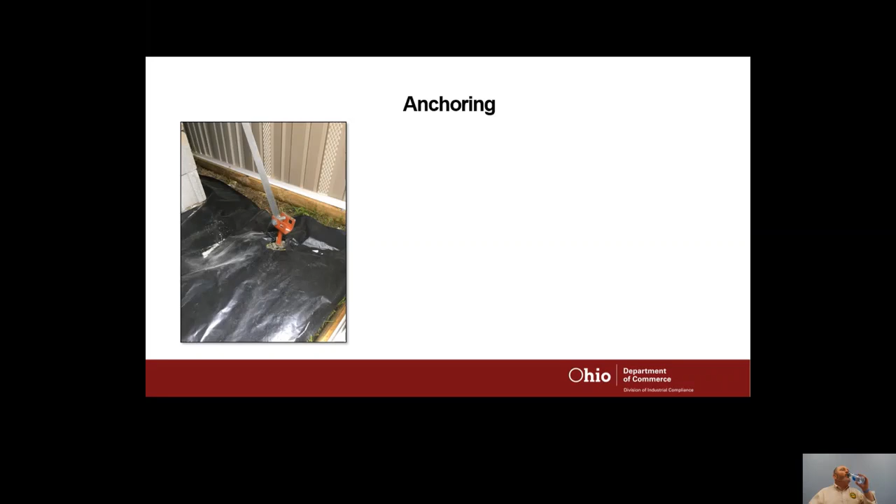Okay, another anchor strap. The picture that I am showing here, and what I want you to notice, is the amount of turns that is on the strap itself.

The manufacturing companies of these anchors will give you in the installation instructions how many turns they want you to make when you're putting in the anchor. If they say, hey, we want you to do 4 or 5 turns, 6 or 7 turns - just doing it as an example, okay - you have to follow that.

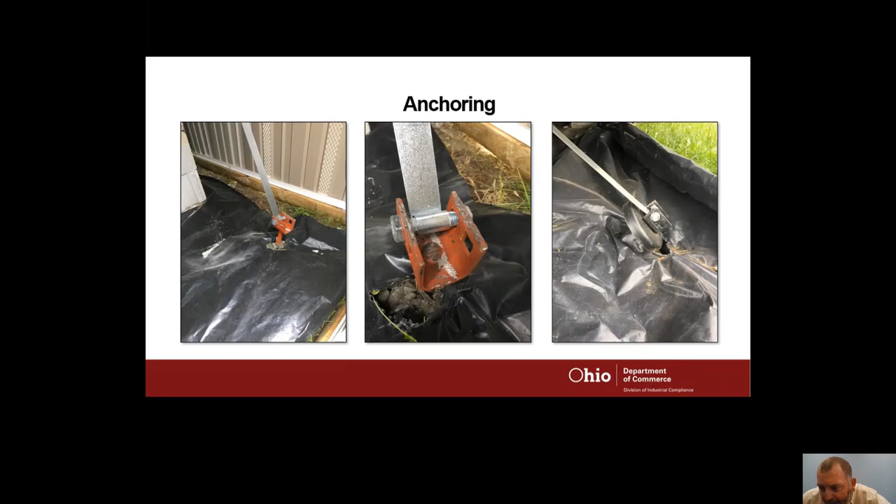Next picture is the zip cap. Now, there is no zip cap manufacturer for tie downs out there that will not tell you that the zip cap must be flush into the ground. As you can see in this picture, you could walk over and stick your foot and stand on the vapor barrier, and have your foot in between the vapor barrier and the top of that zip cap. Heck, you could even put probably most of your foot underneath the back end of the zip cap and the ground.

So it's another installation issue showing that if you're going to use the zip cap, you must have it flush into the ground - it has to be into the ground. Every manufacturer that makes these types of tie downs, in their installation manual, that's what it's going to tell you. It must be done, okay. Again, the reason why is because that's not going to hold.

You know the reason these anchors are made is because they're engineered to withstand the pressure of a wind event that may come through and try to push that home off its foundation. All the engineering these companies have done is basically to meet those requirements. We don't have to worry about those requirements because we're not the ones building these products. When we buy them, they've already been engineered and manufactured to meet these minimums, the 3150 working load.

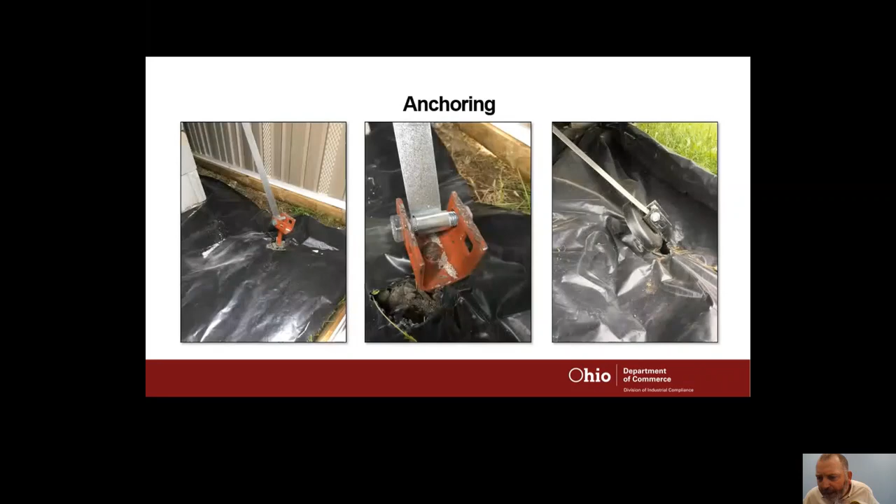I'm not going to just take one home and pick it apart. I mean, I will, and it needs to be fixed, but I'm just letting you know, when I tell you guys this is what I'm seeing in the field, maybe you think I went to one house and found all these problems and that's where all my pictures are coming from. I'm just showing you pictures from different sites, and that's why I'm giving this presentation today. If it was just one home and I never seen it again, this presentation would be a lot simpler and we'd talk about different things, but it's not. It's different sites, it's everywhere in Ohio that I'm seeing these things, and that's why we're talking about it today.

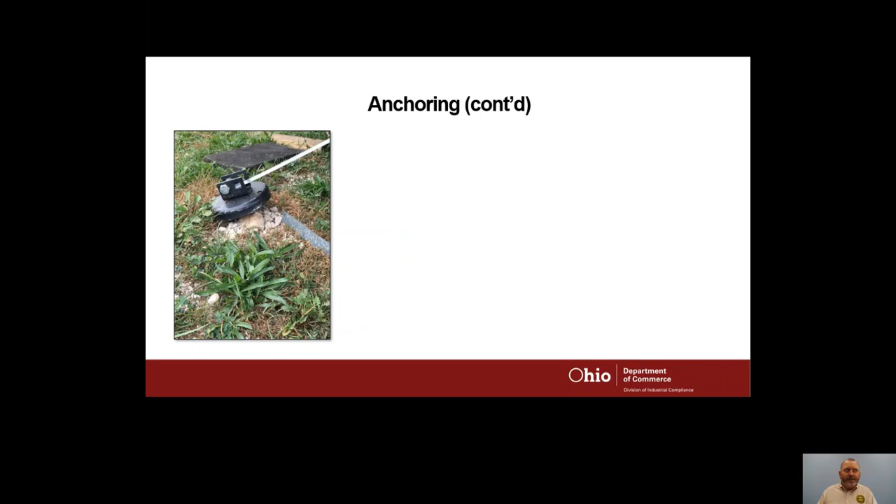Another zip cap, obviously a different home, different site. Another one that's above ground. Now, I understand with the gravel, it probably poses an issue when you're putting that zip cap into the ground. Personally, I think you're all probably saying to yourself, that person, whoever they may be, probably should have put the zip cap in first and then put the gravel in. I don't know if they did it, but to me it looked like they put the gravel in and then tried to put the zip cap anchor in. Should have been the other way around. But again, it's outside of the ground, not installed correctly.

Again, if something happened to that home, whoever installed that product will be held accountable for whatever happens from that scenario.

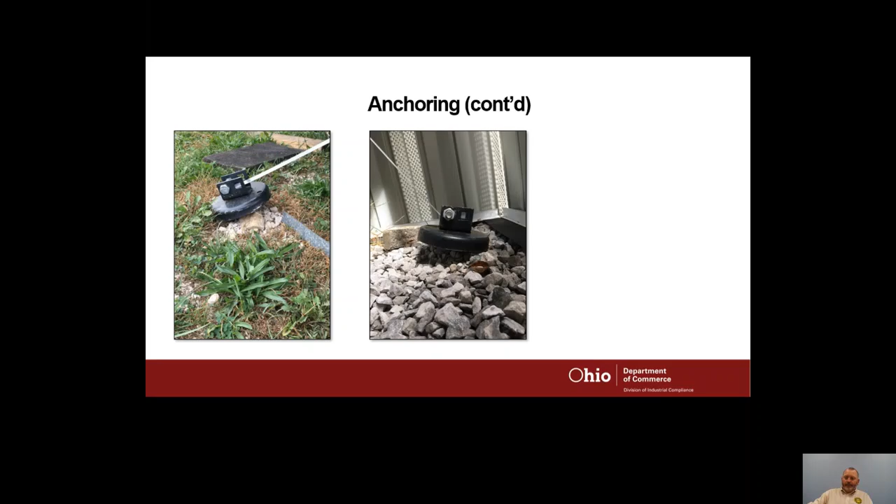Again, another zip cap. Now the last two pictures probably are from the same home. You can see that the vinyl skirting is vented all the way around, gravel, in the same kind of scenario. Doesn't look much different than the other one.

But again, whoever put these anchors in on the four corners, all four of them are going to be like these last two that I've shown you.

I guess it would be a little bit more frustrating if you went to a house and seen one corner anchor done completely 100% the right way, to the installation instructions, and then you walked around and seen the three other ones not the same way or done to the instruction manual. That would be frustrating because you'd be like, well, wait a minute, you did the one completely the right way. Why are the other three not?

We would have probably an answer for that, and I'm sure you're thinking about that, but I very, very seldom see something like that where I see something perfect - and when I say perfect, to code and to the instruction manual of the manufacturer - and other ones not.

Now, I'm not going to say I've never been to a house and seen anchors where they just did the four corners and seen three of them perfect and one of them not, and there was a reason. That happens. We all know that happens. But whatever that reason is...

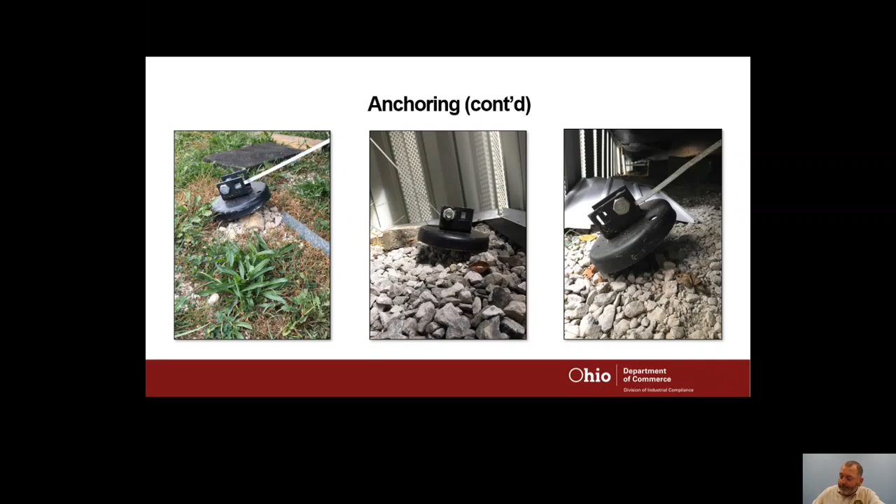Okay, another one on the anchoring. You can see the stabilizing plate, it's out of the ground, it's not installed correctly. The head of the anchor is obviously a lot further out of the ground, and you get to the point where when you see something like this, you just think to yourself, well, how did we get to this point right here, where you got the right material, you got the right product.

I've seen a lot of them without stabilizer plates. So he's got the stabilizing plate, but yet the stabilizing plate's not into the ground to code or to the installation manual, and the anchor is not flush with the ground with the stabilizing plate.

So, you know, it's like you used the right product, you went as far as doing all that work, and I don't know, I can't put an exact time on it, but let's say it's 5 more minutes of work, if that, to get the stabilizing plate all the way where it needs to be and get the anchor head where it needs to be.

I get kind of befuddled, dumbfounded, I guess, a little bit of why I have seen these types of issues in the field, like this picture that we're looking at right now. It confuses me, and it probably confuses you as well.

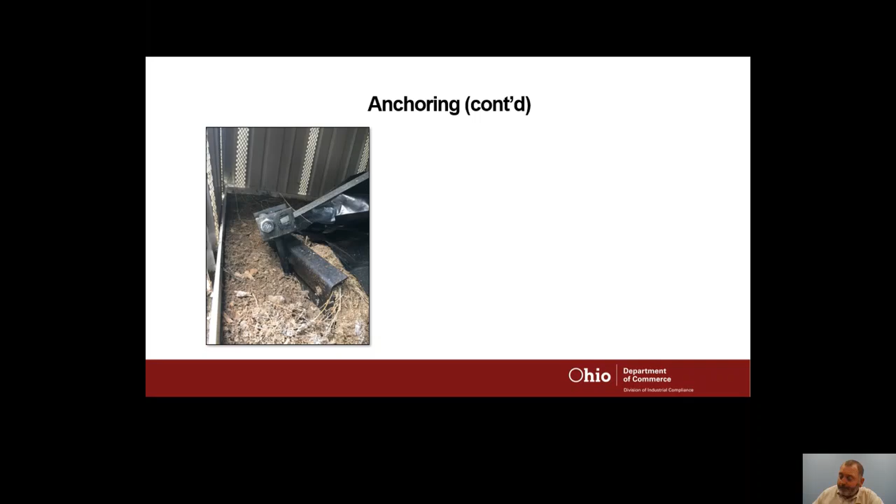Okay, another one, and I'm glad I took this picture. As you can tell on this anchoring, it's into the runner. Everything as far as that was concerned was okay, the amount of turns was okay. The biggest problem we're seeing on this, there's a couple issues, but the biggest one I want to point out is the pigtail. We call them pigtails, which you can see the strap, how big the pigtail they left. It's going halfway up the I-beam there, you can see where it ends there. We want to make sure, look, you can't have any pigtails.

That's another thing, I had somebody ask me once in a class - I found a home, I can't remember where it was at, doesn't matter, it's not important. But I found a home where all 4 corner anchors had pigtails, but they were only like 2 inches long. Somebody asked me, is that an issue? Because most pigtails you see, maybe not quite this extravagant and this long, but most of them you see are quite long. Somebody asked me in the class when I showed these little 2-inch small pigtails, if that's an issue, because most of the ones they've ever seen were the long ones like this.

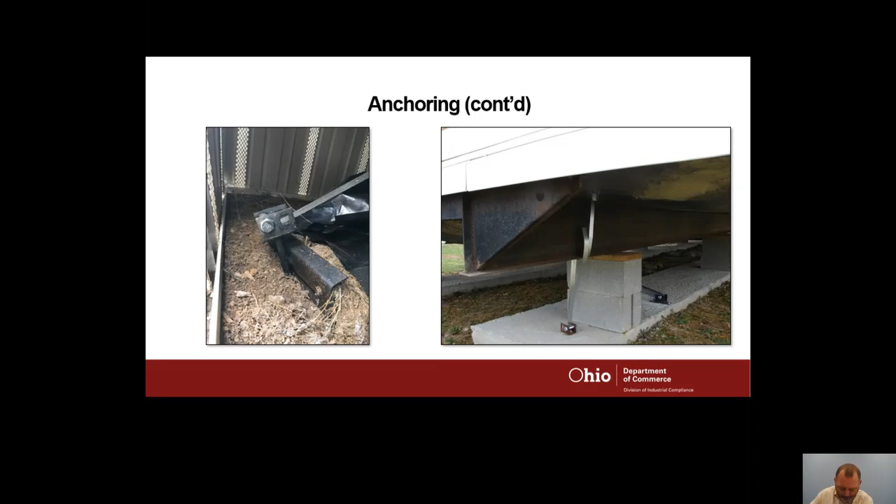Okay, the next part we're going to speak about is the ABS pads. We want to make sure that when we use ABS pads, that we are installing them, just like the anchors, to the installation manual, okay?

Now, one of the things I wanted to point out, and I usually don't do this when we're doing a live presentation, but because we are doing this by video, I want to make sure that everybody understands how this all works when it comes to the Ohio standards, installation standards, or code, however you want to word that, okay? In Ohio, our installation standards are only for used homes, okay? We all understand that. When it comes to a new home, everything has to be set up to the installation manual that came with the home, or it has to be set up to an engineer's specification. Okay, we got to tell you that, but let's be honest.

In all the years that I've been here at the state, I think I've only had one engineer send me a setup plan or a blocking diagram or footers. And to be quite honest with you, I had to call this engineer and I had to tell him I have to accept what he's saying, but I'm going to have to put my foot down and not allow what this homeowner was going to do with the setup of their home. It was a double wide, and this engineer actually took the time - they were probably friends - and they took the time to do a diagram, an engineered drawing of the foundation of this home for this double wide. So he emails it to me.

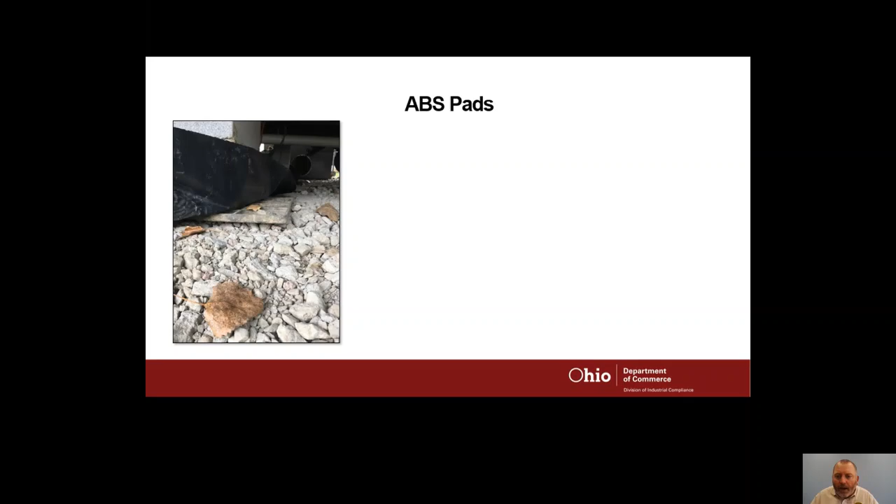Okay, another picture shows a gap, as you can see. So if you look at the block, and the very right side of that block, if you go about 2 inches further to your right and down, you can see where there's a gap. Again, it's not touching. It's not evenly dispersed over the gravel.

Okay, so I just want to make sure that you understand everything I just told you. I want to show you these pictures so you understand there's a reason why I'm talking to you about this. I'm not just doing this to have something to talk about or rattle anybody's cage. I'm doing this because I want us to all do these things the right way so that none of us has to go back out and get involved into a situation where there's now a dispute or a violation to Ohio standards. Okay.

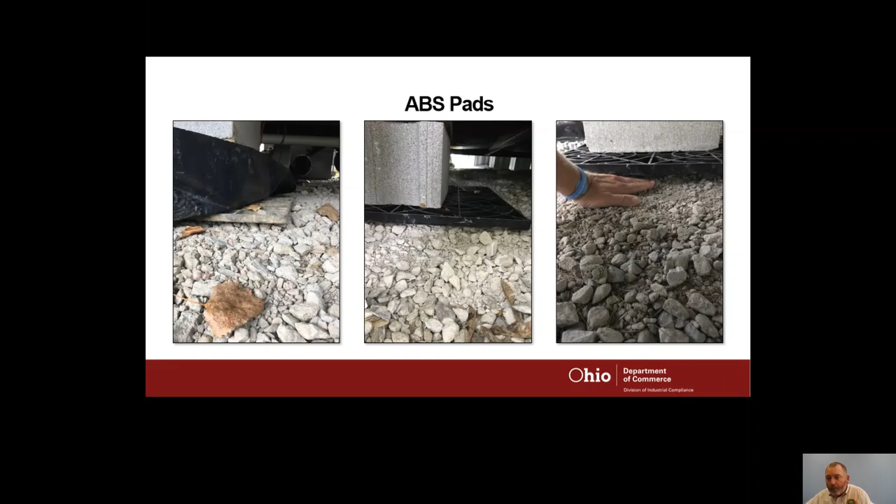Here's a picture here. You can see my hand. I don't know how easy it is to tell, but my hand is partially underneath of the ABS pad. I couldn't stick my entire hand up underneath there because it was touching the ABS pad with the gravel, but part of my pinky, ring finger, and part of my middle finger is underneath the ABS pad.

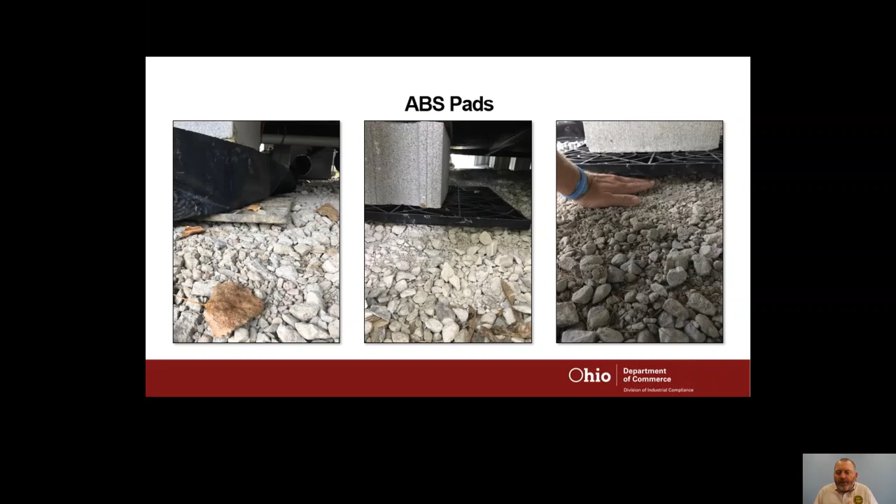Okay, so I'm basically just trying to show you that this is an issue, and I'm seeing it in a lot of areas. It is the number one issue in the state of Ohio—ABS pads, bar none. Nothing's even close. ABS pads are not being installed to the installation instructions of the manufacturer. I don't like it. It should scare all of us because there's going to be problems down the road. Okay.

All right, now that we've talked about ABS pads, we've all got that on the front burner, in our mind, focus on it, make sure that we understand it. Okay, now we want to talk about grading. I'll tie this all into even the ABS pads, okay?

The reason why we use ABS pads in the state of Ohio like we do is because of grading, okay? The biggest reason is because of an engineering study that we did—I want to say it's been 15 years ago or more. I don't have the exact date, but the OMHA, the Ohio Manufactured Homes Association, who's putting on this class, actually did an engineering study, and they wanted to see how ABS pads worked. This is back when ABS pads were kind of getting off the ground.

And then everybody wants to use them—well, I shouldn't say everybody, but a lot of people do, especially homeowners. Because if you come to a homeowner and say, hey, we can put it on this footing and set your home up, and it's going to cost X, or we can do a full slab under there and it's going to cost Y, and X and Y is about $20,000 difference—obviously if they got 20,000, maybe they'll do it. But a lot of people are like, hey, do those things work? Are they good? And you say, yeah, they work. They're engineered just like a concrete footing is. They meet all the standards. They're probably going to say, hey, I'll take the ABS pads, I'll take that money and put it into something else.

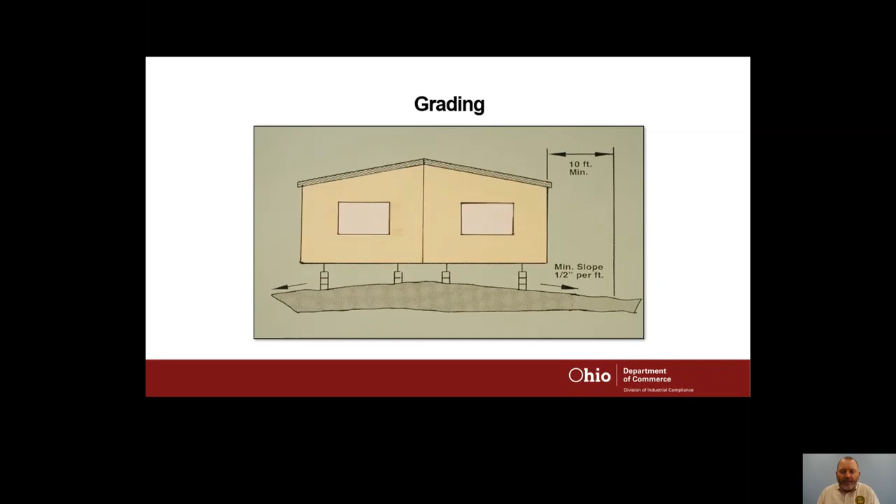As far as I'm concerned, and I think most people who've been in the installation business like I have all these years would agree, grading is the number one issue when it comes to setting any home. So make sure when you're setting your home and using ABS pads, or whatever footing you're using, you meet these requirements for grading, which is 1/2 inch per foot for 10 feet. Once you get that 5 inches of fall from each side of the home, you can feel comfortable knowing water isn't going to go back uphill and get underneath the home and cause devastation to your footings or the home itself. That's how important grading is. Make sure you get your 1/2 inch per foot for 10 feet slope away from the home.

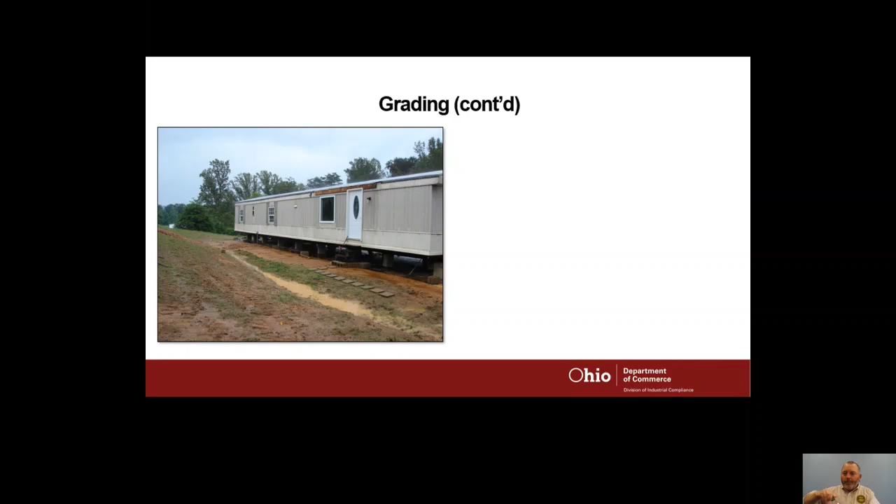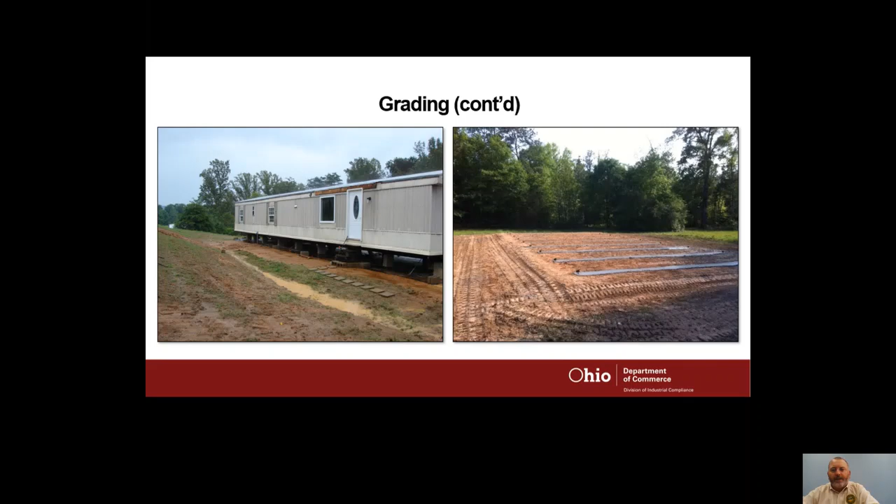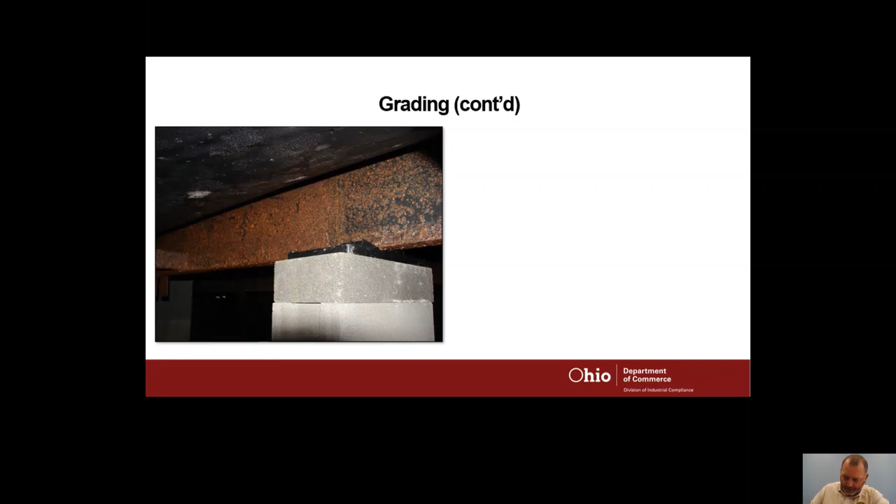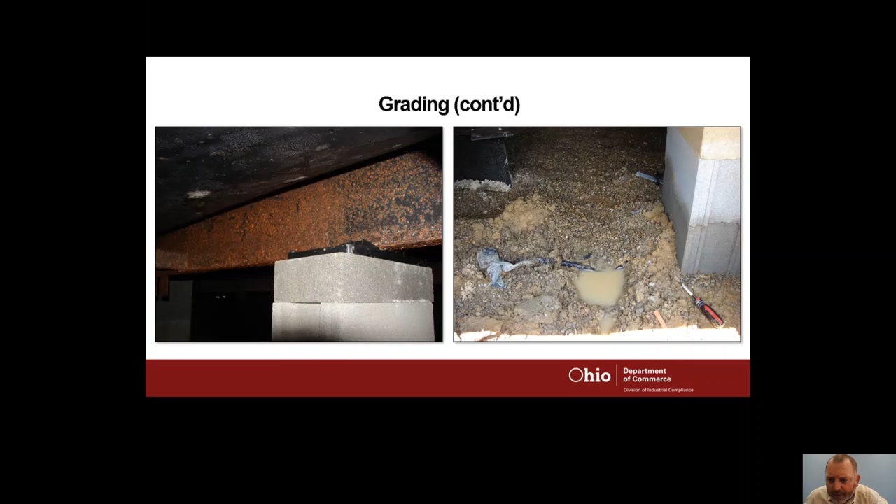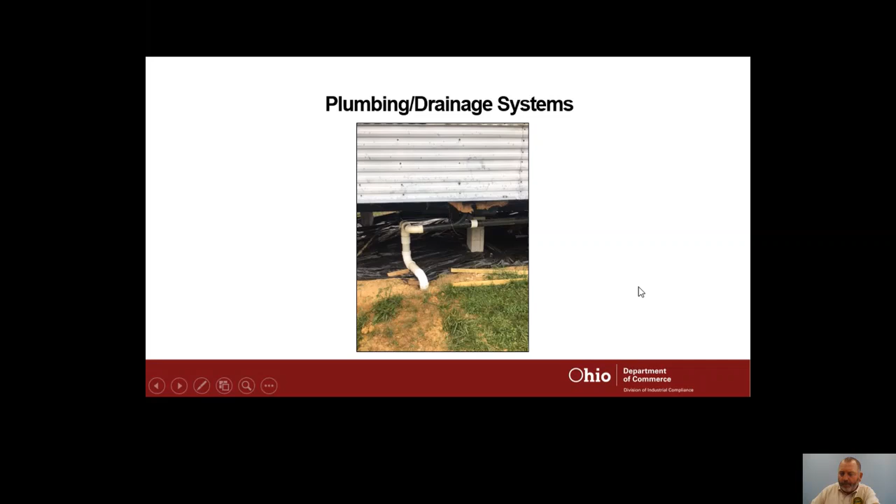Protection from effects of frost heave. Obviously we all know most of our manufactured homes in the state of Ohio are set at grade. The reason we set them at grade - I've already mentioned the engineering study we did - is because we've spent so much time and effort finding out what the effects of frost heave can have under different circumstances. What we want to discuss here is the protection from those effects of frost heave.

Manufactured homes installed in Ohio must use one of the following methods to be protected from the effects of frost heave: conventional footings placed below the frost line depth.

Very simple - you can use ABS pads, you can use poured in place concrete. Now remember, the state of Ohio is different - Cleveland's frost depth is different than Columbus, and Columbus and Cleveland are obviously different than Portsmouth or Cincinnati or Marietta. So you always have to find your local frost depth. You're always going to be able to find that at your local authorities in the county where you're setting the home. They can give you that information.

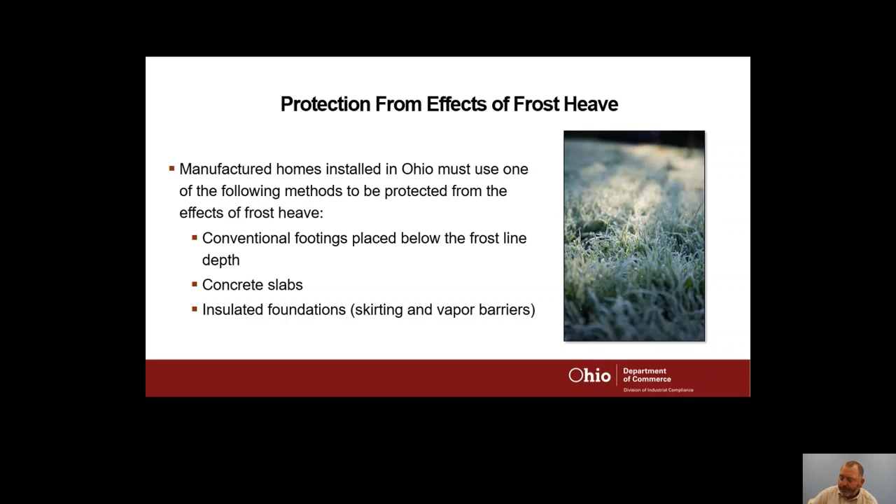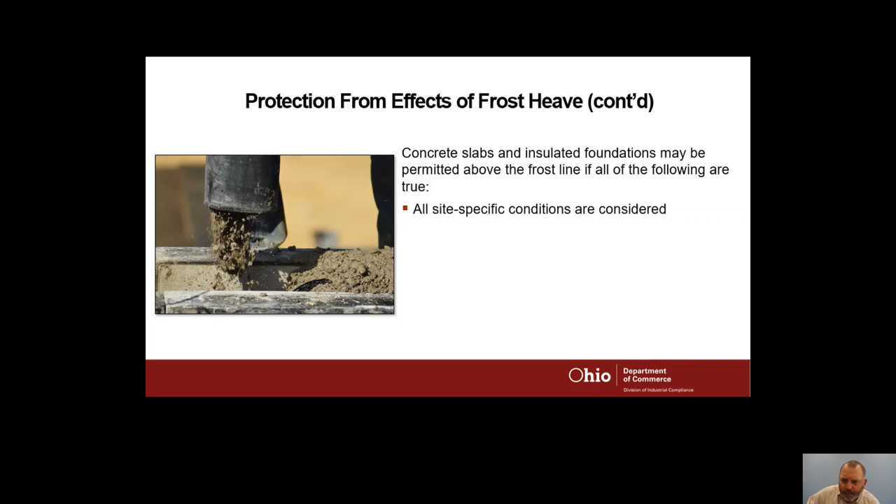Concrete slabs and insulated foundations may be permitted above the frost line if all site-specific conditions are considered and the design is done by a registered Ohio professional engineer or architect, in accordance with anchorage requirements of OAC 4781-6-03.4, acceptable engineering practice to prevent the effects of frost heave, or the ASCE SEI 32-01. The acceptable engineering practice to prevent frost heave is what we mainly use in the state of Ohio.

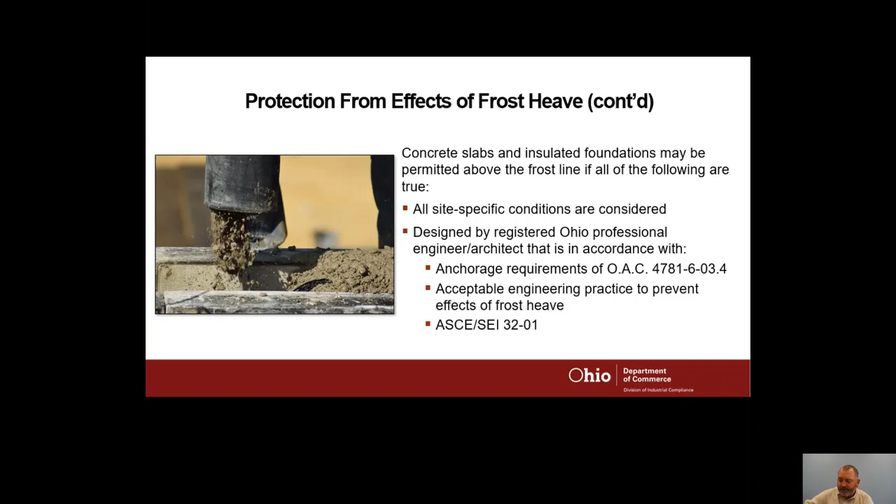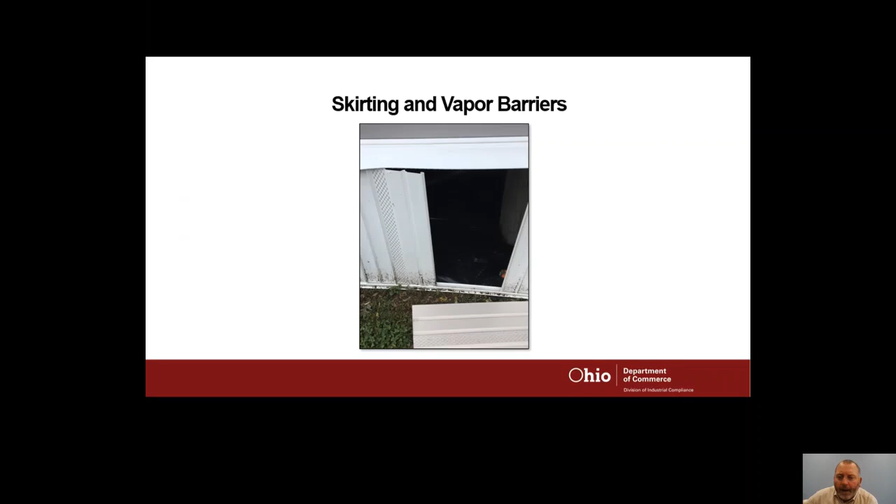Now we're going to talk about skirting and vapor barriers. One of the things that causes confusion is when to use vapor barrier and when not to.

It's very simple: vapor barrier is predicated on the amount of ventilation underneath the home. Let me find it here under OAC 4781-6-03, section D as in David, proper installation. Vapor barrier is basically tied into the ventilation. The easiest way we've instructed everyone with an installer's license to understand this is through ventilation.

So how do you get ventilation? Well, ventilation either comes through your vented skirting or the vents you put in the skirting.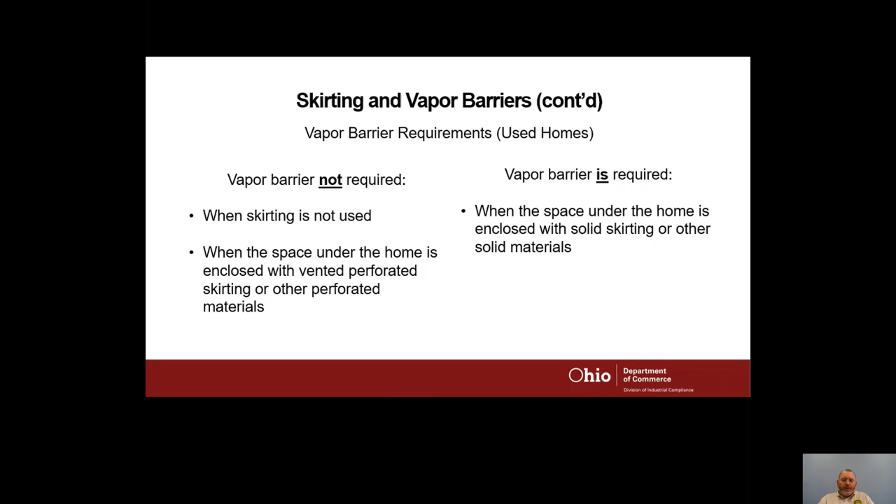Vapor barrier is required when the space under the home is enclosed with solid skirting or other solid materials. Now, if you use solid skirting - and I hope you know you cannot use solid skirting all the way around a manufactured home - you have to have at least a minimum amount of ventilation.

That minimum amount of ventilation is what we use, and to be practical instead of getting into the numbers like 1,500 square feet or 150 square foot, which can bog you down, the easiest way to understand it is: solid skirting with 4 corner vents. That's the minimum amount of ventilation, therefore you have to have vapor barrier.

If you have the maximum amount of ventilation - obviously if you're at grade or frost depth with no skirting at all - you're at maximum ventilation, so you don't need vapor barrier. But if you use vented skirting all the way around the home, you're getting the maximum amount of ventilation underneath the home, therefore vapor barrier is not required.

Again, I don't want to confuse anybody: vented skirting all the way around the home means you do not have to use vapor barrier. Solid skirting with 4 corner vents means you have to use vapor barrier.